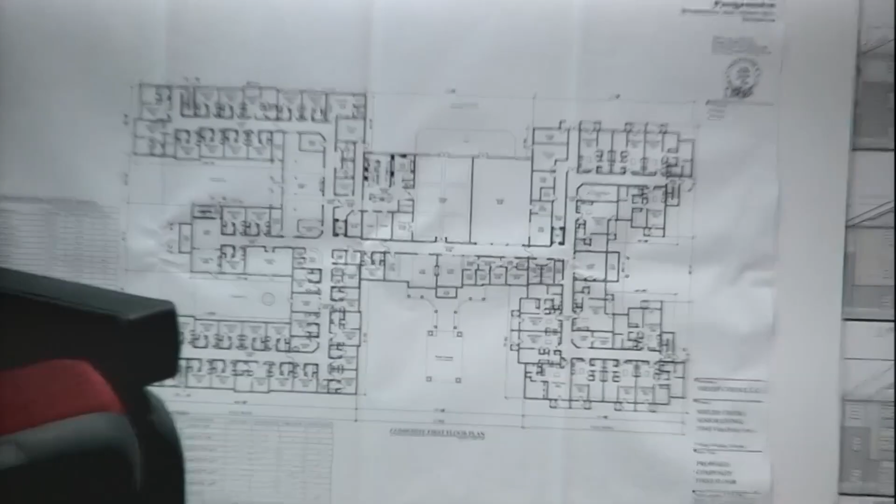And so we talked to different management groups, and this is what their suggestion was. This is one of the reasons why we're here, to try to get this project approved. We meet every aspect of your ordinance. We went and obtained a DEQ permit for the floodplain impacts and the wetlands impacts. We do have a permit from the Department of Environmental Quality.

The site meets all the restrictions, all the parking requirements. The facilities will house 166 units. The discrepancy between the 165 units and the 166 is that they added one unit as a guest unit for people out of town visiting their loved ones or whatnot. So that's why there's 166 units.

There's plenty of adequate space inside. I don't know if you had a chance to review the actual floor plans. Inside, there's a lot of facilities for the seniors to play cards or whatnot, have bingo games and all different kinds of facilities. It was very well planned and thought out by professional management groups that manage this sort of living. This is probably some place that I may want to end up living one day.

But it's a great location. The project is approximately 8 acres. It's on Van Dyke Road between 24 and 25 Mile Road on the west side of the road. I believe it's section 9. It's currently zoned R12, and there's R12 uses on both sides. The whole zoning on that Van Dyke Road is all R12.

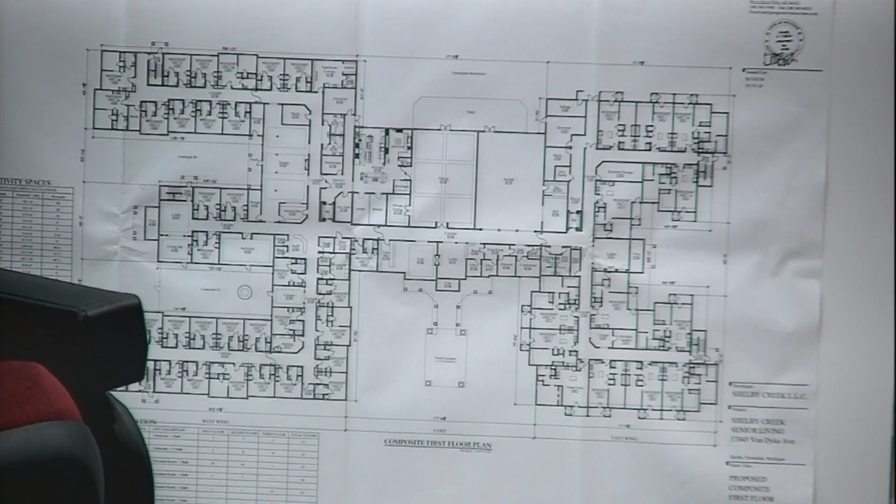And you're comfortable that what you're proposing is adequate to their requirements? Exactly. In the plans, we spent almost 2 years reviewing and doing the plans with one of the top architects, Dan Tosh, from Progressive Associates. I don't know if you're familiar with him. He's one of the top designers for senior living in the state of Michigan. He's won numerous awards, so he knows exactly what to do and how to lay out the units.

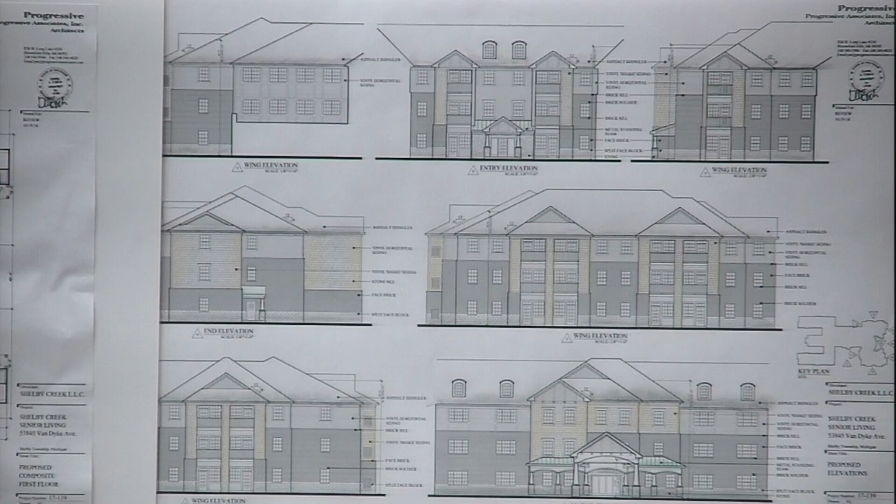Have you done a market study? Yes, there's a feasibility study that's been done, and it's very positive. Otherwise, you don't get the funding.

To the board, any questions? I do have a question. So you are proposing a bridge over the middle branch of Clinton River, correct? That is correct, yes. Are you going to have railing or some sort of guardrail? Because I think there's a 6-foot drop from the road to the drain. Yes, there is.

The only concern I have is access to the site. If there's any problem with the box culvert or the bridge, any problems with the sanitary and water main requiring repairs, the road will be shut down, trapping the 166 units. The box culvert is in 3 sections, so more than likely all 3 sections would have to fail for that to happen. There's always a portion that's going to be open—we thought about the same thing, so there are multiple layers of service.

If there's a problem with the sanitary sewer going underneath the box culvert—the excavation, the width of the trench, having vehicles working on the site—I think that's going to shut down the road. That would all have to be engineered. You're correct, but that could happen with any other service of a sanitary sewer. Just because this is over a river, there's no way to get out—if there's any emergency and the road is shut down, how is the senior going to get in and out? Well, the road won't be shut down.

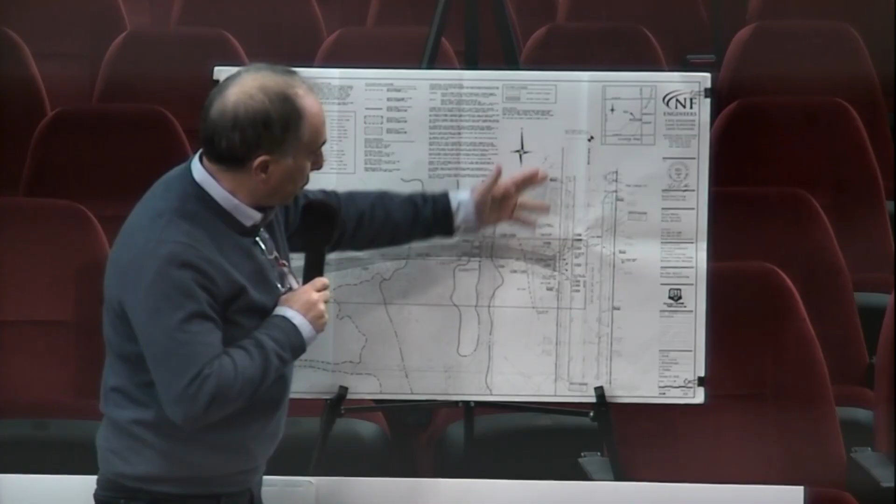This driveway here is 33 feet wide onto Van Dyke. It's a commercial road, no different than another commercial road such as Van Dyke failing. What happens if Van Dyke shuts down? This box culvert is going to be engineered so it won't fail, no different than any other bridge on 21 Mile Road or 22 Mile Road.

What happens when those bridges fail? You have another access to go around it. This is the only drive going to the site - the only drive to connect to your facility. If there's a problem with 24 Mile or 25 Mile, you can go around it using 23 or 26 Mile.

Can you explain the culverts being in multiple pieces? There are 3 sections of culverts - 10-foot box culverts. Chances are this is no different than the bridge design they did on 21 Mile Road through the Clinton River, with culverts and bridges. I'll ask our resident engineer on the board, what's the likelihood of those 3 components all failing at the same time? They won't fail all in 3 pieces, he's correct.

But if the sanitary sewer is deep at this location to service your facility, one piece removed to replace the sanitary sewer won't be enough. You'd probably need to remove 2 pieces to replace the sewer, and the other portion you're leaving is where vehicles come in and out to excavate. That's why there's going to be a temporary shutdown for the facility.

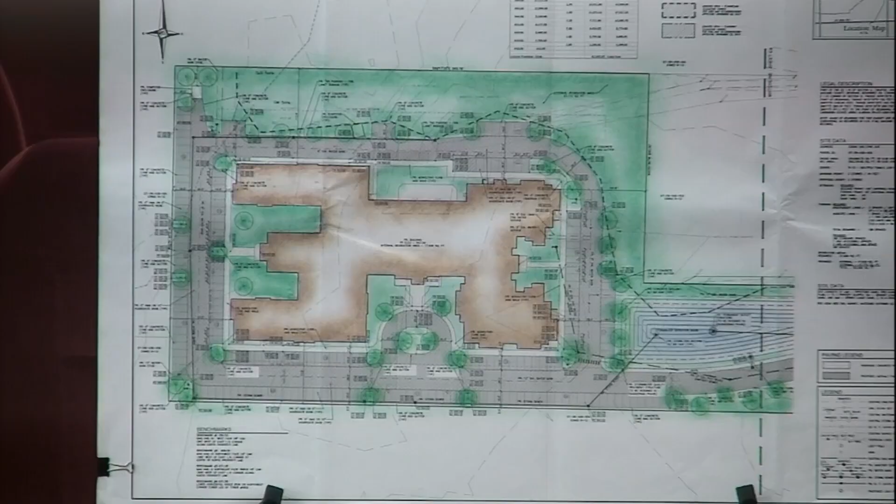When we had this meeting here last year, it was turned over to the DNR to determine if this was going to be accessible to build on this property. Has there ever been a report from the DNR back? There has? Is this going to be okay for this? Like the other gentleman said, is there going to be flooding over here later on?

And also the impact on nature. This is one of the last stands in Shelby Township that has trees and everything. We've already developed land north of it where they've clear-cut it. Behind me, I live across the street, and there's not really a whole lot of places for the animals and everything to go anymore. When I come out here, that was the emblem of Shelby Township, a nice big beautiful tree. Well, the joke going around is all that's left anymore is just a stump.

There's plans to build another one of these north of this development by 25 and Van Dyke. There's another one going on south of this already. Is this what we're going to be classified in that little stretch as, the senior citizen complex? That's all I have to say. Okay, thank you.

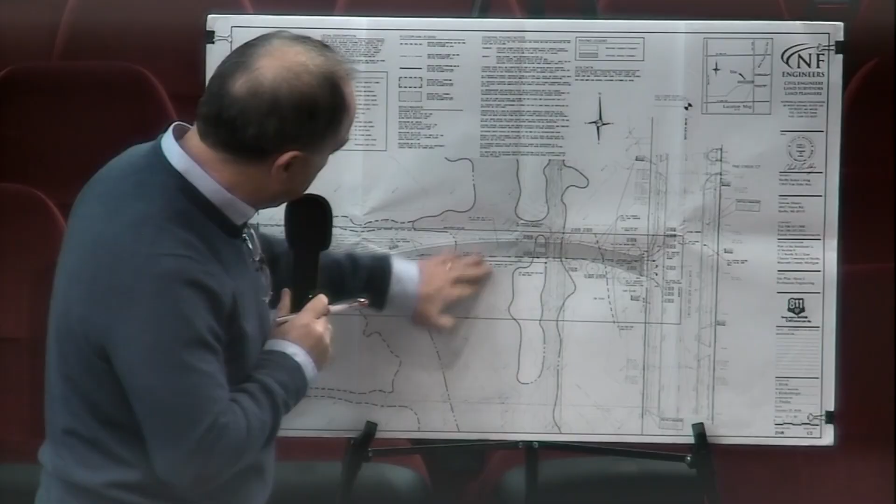So where you have the road and then the shaded area, the wider shaded area — can we look at the plan? Not here, next to it, to the left. No, this — the wider shaded area right next to it. Where is the floodway? This piece is all floodplain. This is not being touched.

Okay, I can't reach there, so the floodway. Do you mind if I approach? The guys in the glass booth might be upset, but they can't get our microphones to basically work.

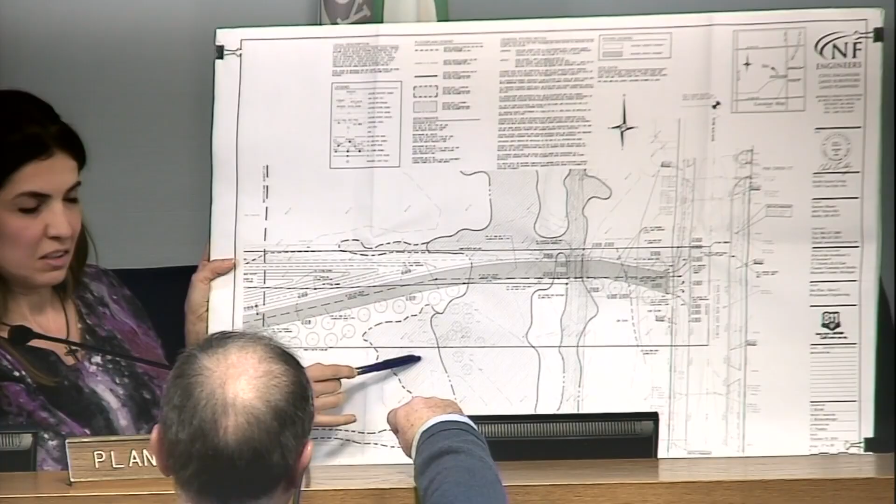So this shaded area is all floodplain. Correct, this is a floodplain. So you're filling this road. Correct. So this all is going to get filled. Correct. So I'm asking if this pond accounts for the 2 inches over the site plus the fill material. Yes, we wouldn't have had a permit without that.

Okay, that's how it works. You know that, you're an engineer. How do you get a permit?

Just make sure you get a LOMR. After the work is done is when you get a LOMR. You can get a CLOMR prior, correct — a conditional letter of map revision. Make sure the site is going to work. We'd rather get the LOMR after the work is done.

Mr. Wozniak, would you do a CLOMR? I would, if it was me designing the site, I would do a CLOMR. Well, you're not designing the site. But if it doesn't work, then it will be an issue — obviously you won't be able to build it.

He wants to do it after it gets built, the LOMR. You can get a conditional letter of map revision from FEMA, or you can get a letter of map revision after the work is done. Being that we have the permit from the DEQ and the DNR, they're allowing us to do the work. There's a 5-year permit — if we get the work done within 5 years, then you apply for the LOMR, which is a letter of map revision.

Typically for residential, our first floor is 2 feet above the floodplain elevation. We almost don't even need a LOMR because it's not going to affect the site, since all the residences are 2 feet above the floodplain elevation anyway. That only applies to single-family residential. So whether or not you get the LOMR or CLOMR — I'm sorry, we keep talking about this, but the comment is not about your facilities getting flooded or not.

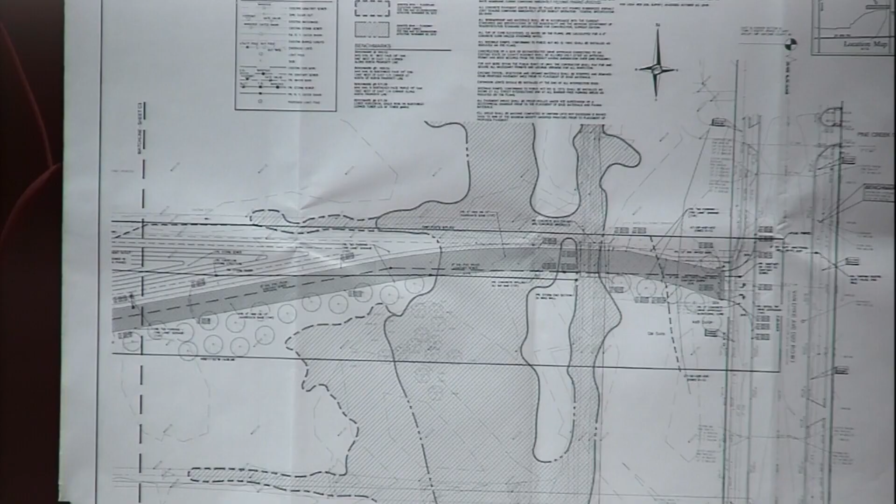You can submit it to the township engineer and she'll take a look at it. But we already have. Can I interject here for a second? Why don't, before this goes to the board, or if you want to table it, I'll have our engineer send us a letter documenting what permits and requirements are necessary, so we can get that settled. But the engineer has to review and sign off before anything gets done on the property.

I can try to get some clarification for the file and share it with everybody. I think that's fine, but I don't think it's a condition of this approval. But before it goes to the board, I'd rather have them have that information if they have those questions.

Anyway, I wanted to point out to the residents and everyone on the board, these really aren't surprising questions. Our township engineer made some points originally in their report. It must be demonstrated that the storage in the proposed detention area is provided above the existing groundwater normal water elevation. There is no storm sewer indicated for the entrance drive. Stormwater management must be provided for the storm sewer in this area.

And all drainage must remain on site. Adjacent to the entrance drive at the southeast corner of the site, it appears that drainage is not contained. So just letting the residents know we've already addressed these issues, and they're going to be worked on. I think everything we brought up here is pretty relevant. Thank you. Okay, is there a motion to close the public hearing? So move. Moved and supported, all in favor?

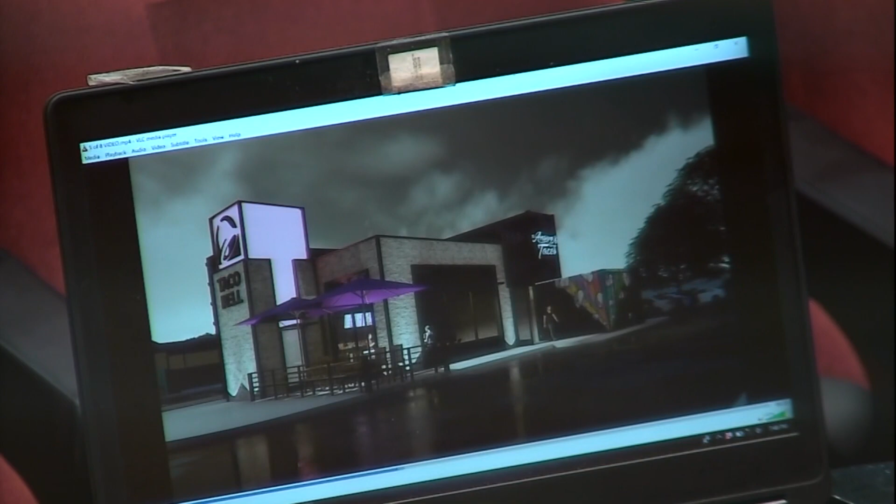That goes through the history, why we want it. So perks of a container are you're going to have a faster construction schedule, you're going to have green initiatives because you're reusing product materials, and you're also going to be on trend. Taco Bell is always trying to be ahead of the curve and be that trendy new restaurant, and this really fits in with that.

Talking with Glenn and the planning department, we were looking at different options originally. What we came to is let's paint the containers black and make them look more like the neutral feel of colors in this area, but also have some brick-looking elements. So you'll see the dining room area there is a different color, and the black is all the containers.

These renderings don't do a great show, but I think in your packets you should have that full package of renderings so you can see all the different views of the building. This just kind of condenses it and puts it all on one. Some other features of this building are some artwork elements to just break up that monotonous black.

So that's the building, but then the site is another reason why we're here. I'm just going to step over towards my site plan. It's all in your packet, but the site is not a standard square, and there's the drive-through that comes around. This is going to be the drive-through window up here at car number 1, and we have a stack that goes all the way up to 9 cars, and you can probably even fit more than that before even starting to stack on the site.

This site is currently a Pizza Hut, and the building sits on this side. So we are going to flip that, and this is the Burger King down here, and now the building's going to be over here.

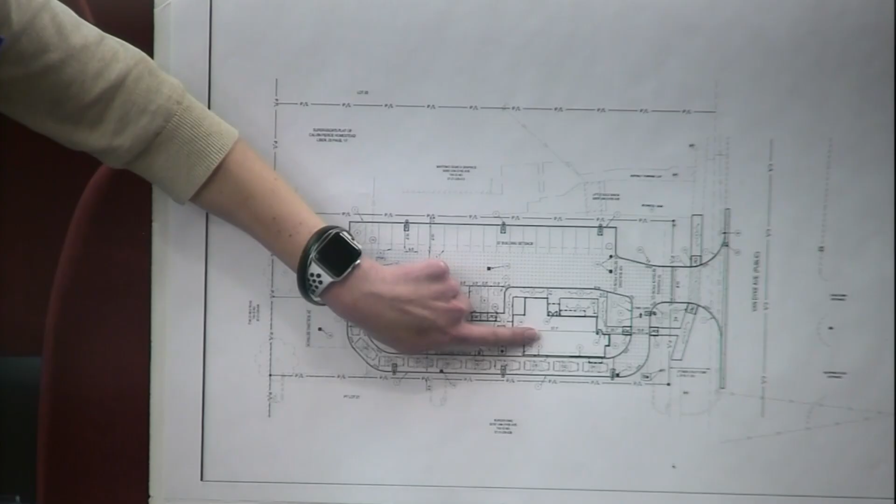One of the questions I know Glenn had brought up is a bypass lane. That is not required by code, but there is sufficient stack, and we do meet standard code requirements. The width of the site does not allow us to fit in a bypass lane unless we were to reduce the width of the drive-through lane, and that's the only way we'd be able to fit one in. But it is sufficient and meets code for that reason.

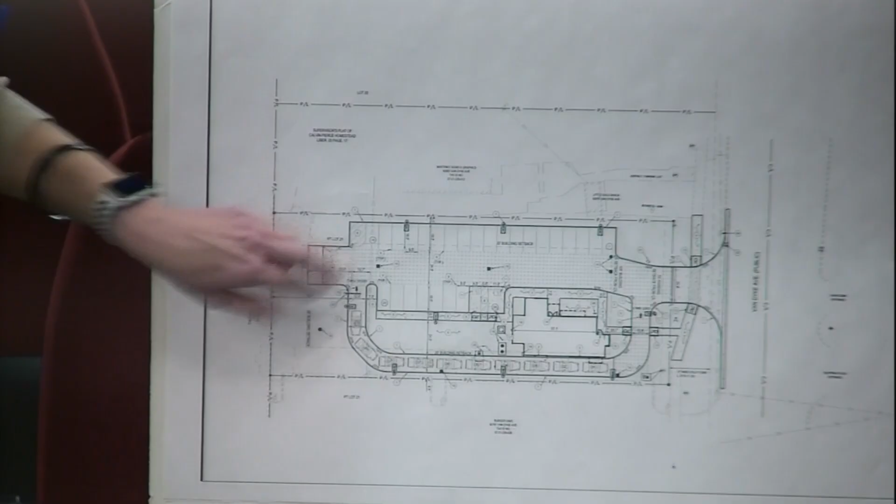Other things to point out on site: we have a dumpster here in the back. It is a 24-foot wide drive aisle, 24-foot wide curb cut here in the front for dual access, and we meet parking requirements.

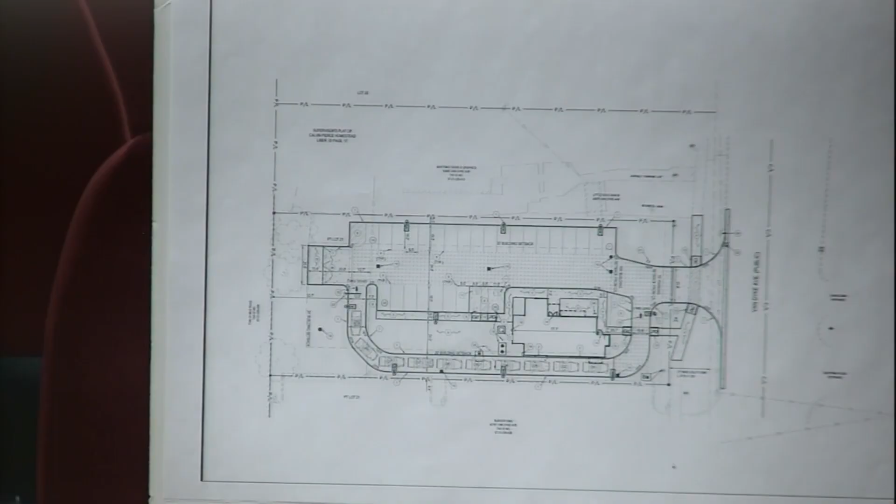For drive-through requirements, we are going to propose a small patio in the front here, and there's also going to be a lot of landscaping on site. We will also fix the sidewalk in the front, and there are a few comments on that on how I think the township engineer wanted that revised, so we will make those changes too. But other than that, with the site, we feel we're pretty much on target.

It's more the building and the building elevations that we think we're going to need to discuss tonight. But we're here to answer any questions, and I'm here with GPD, and JC is here with Taco Bell to help answer some questions too.

Now, is this a franchise or is it going to be a corporate location? Corporate. They do have the option, though, that they could sell to a franchisee at any time, but my company is contracted through corporate Taco Bell to do everything right now.

Good evening, I'm JC Buitrago. I'm with Taco Bell, with the architecture and design team, and I'm actually in charge of all new concept design for Taco Bell. So this is my design, basically.

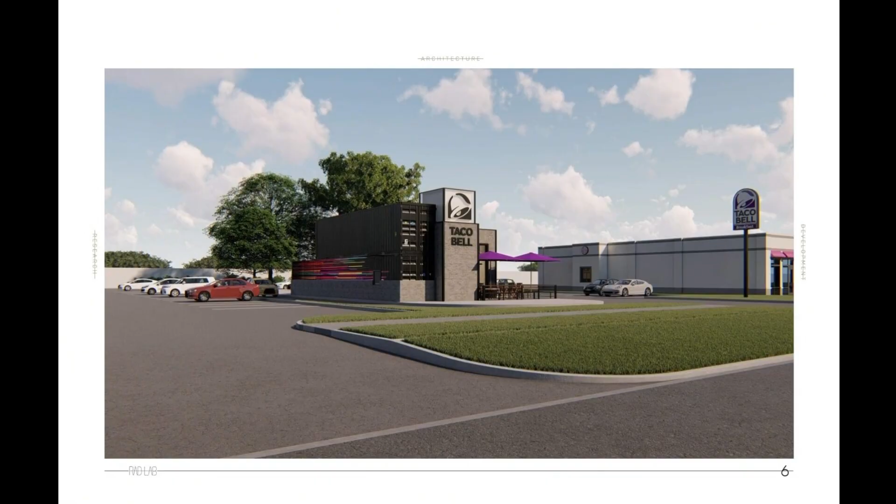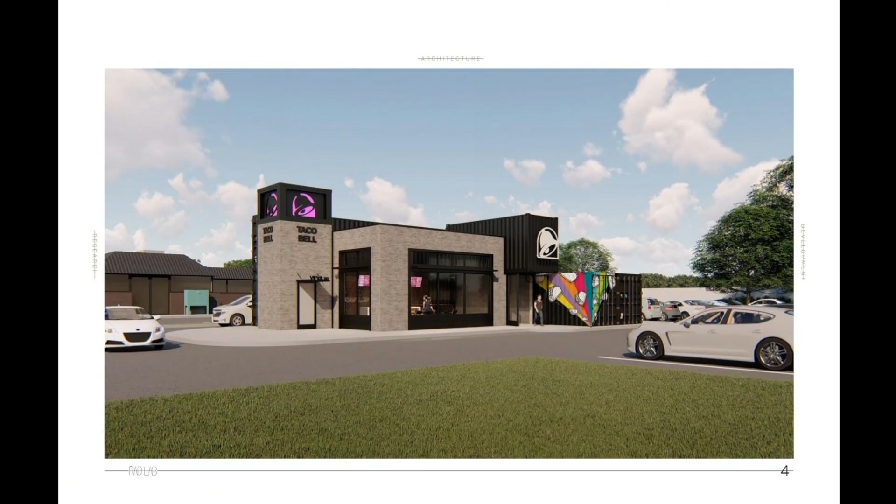First of all, I just want to let you know that this is actually intended to be a national rollout, not a one-off that we're trying to do. As Ellen mentioned, Taco Bell is an innovative company—we're the only ones that can get away with putting Fruity Pebbles on your tacos. I don't think any other brand can do that and actually get away with it. Like our products, we want our buildings to also be innovative, and we feel this building is a pretty good reflection of the brand itself. We are thrilled to be here, and we want Shelby to be our first ever fully dine-in shipping container store, which we can then roll out on a national level after that. So just wanted you to know it's not a one-off, it's actually intended to be a national rollout design. Thank you for your support.

Maybe talk a little bit about structurally—is it more that you use the container for the facade and then build framing on the inside of it, or how does that work?

So we basically left the containers to the back of the house. We were cognizant that this being a new design—even though it's becoming a national trend to use shipping containers for residential and restaurants, and a lot of our competitors are using containers for their own designs—we wanted the dining area to be a hybrid, built on site, so that we could achieve the volume we want, so our consumers don't feel like they're in a low ceiling condition. Also cognizant of the site context, we wanted to put our best face forward on the front of the building, and left the shipping containers relegated to the back end of the house and the drive-through side.

To the board, questions? Yeah, Mr. Chairman. Mr. Turner.

I think it's a very creative and cool design, but I have some questions. You call this a national rollout. Why did you pick this location in Shelby Township for this building? You call it neo shipping crate architecture. Why would you pick this location?

I'm just curious. To be honest, we only have about 30 locations per year of assets that belong to Taco Bell that are company owned. And we felt that being that you're so close to Detroit, being a suburb of Detroit, that this would potentially be a good location for that.

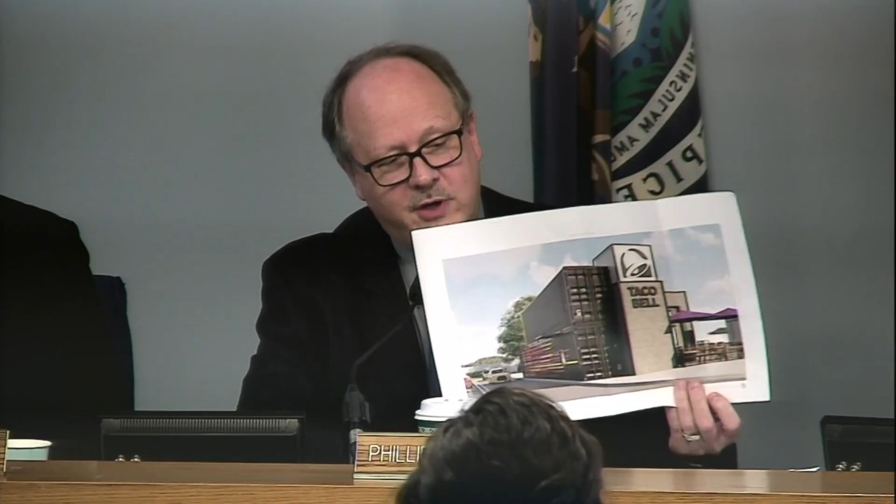I'm just concerned that it may be a little too much for this location. Looking at the rendering you could see from Van Dyke, I think that might be a little too much with the double stacked containers. I've never seen a restaurant like this. I've seen it done in housing, downtown Detroit, they're doing that for housing. And this, to me, looks like it would fit in perfectly in East Lansing or Ann Arbor or something like that.

My level of comfort's not quite there. I really admire you for what you're doing, I think it's great, but I'm just a little uncomfortable with it, just because it is probably so new.

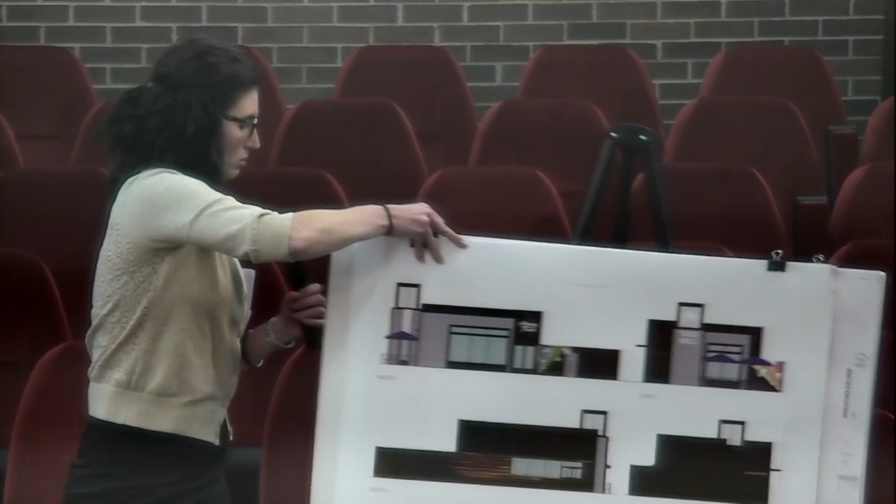Well, some things I'd like to point out—I'm going to flip this so we can all talk about the same sides of the building here. Whoa, maybe not. Thanks. We'll just hold it here.

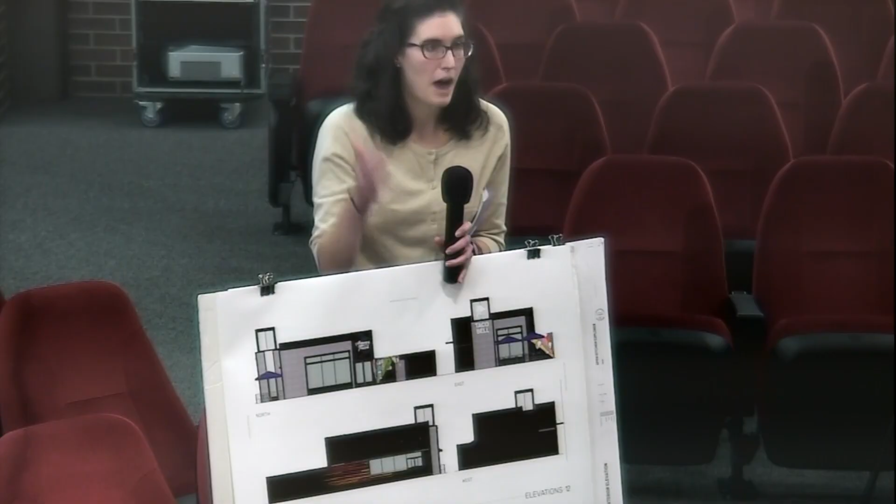So what's going to be visible from the road exactly? Obviously your front elevation, where you have mostly the brick-looking facade, and that's the look we're going for. Yes, it's a container store, but it's a dressed-up container store. It's not just a box, 8 boxes stacked on top of each other. It's a different configuration. But the front, this tower, that's going to be the predominant thing, along with this light up here. That's going to be what stands out, not the black container.

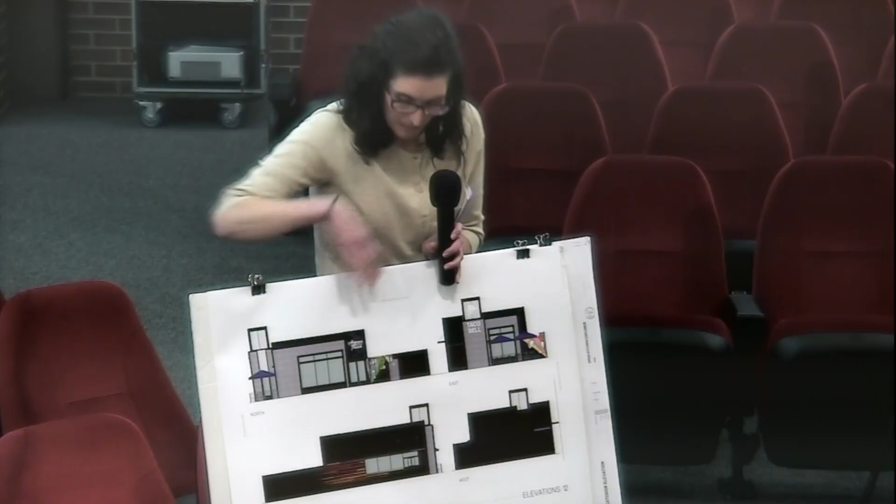This side over here that you're looking at, that's this side—this is all drive-through side. The Burger King building is very close to that. They have their parking lot and their building, so when you're driving down Van Dyke, you're not going to be able to see much of this side at all. You're going to be able to see maybe this front portion, on the right side.

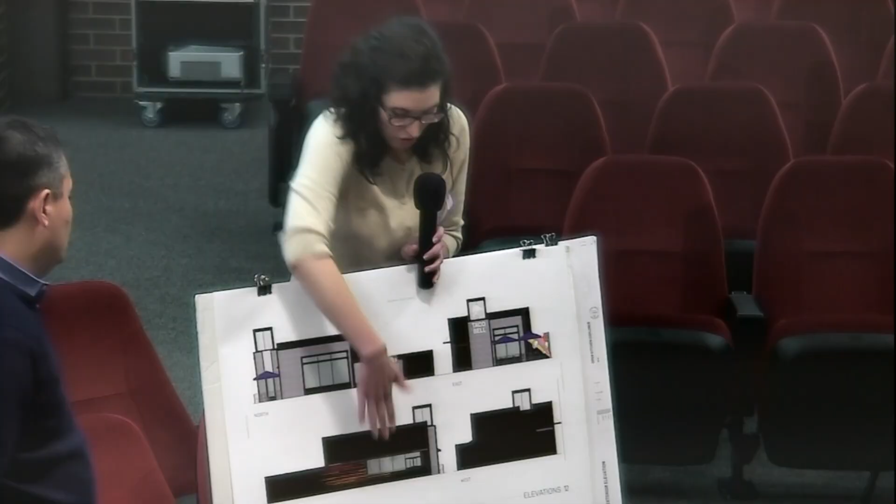Some other things Taco Bell is also doing now is this open kitchen concept. So if there's not a car parked right in front of the drive-through window, they're going to see windows into the building. It's not going to look like just the black that you're seeing—you're going to see windows, and not only the windows, you're actually going to see the people behind them getting your food ready, actually making it. So the food becomes obviously the star of the show here.

I have to say, my initial reaction was this seemed like more of a use for a more urban area than suburban. But it frankly didn't take me very long to come around to say, from a planning perspective, that stretch of Van Dyke has been developed for 60, 70 years, and a lot of it's old and tired. So to have a little catalyst, something that's new and a little bit outside of the box...

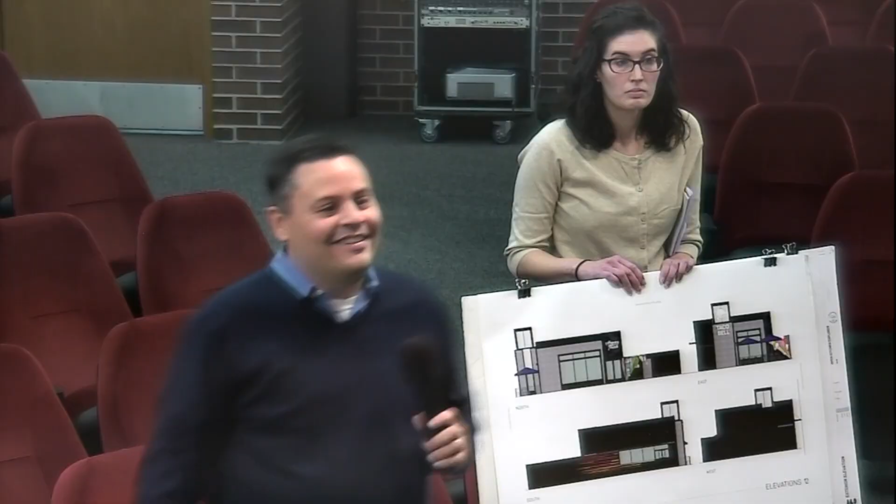But as you point out, and I think that was a nice job to show what's next to it—a new Verizon or, it's a T-Mobile, and they actually have a gigantic pylon that's bright and pink and vibrant. So it kind of fits, and then there's Burger King. Frankly, your demographic isn't me anymore, but my three 20-some-year-old sons are all about it, and this would fit more to them. Not that this is going to be a destination, but at least it gets people talking about an area in the township we've talked a lot about recently regarding redevelopment plans, and sometimes it takes little small sparks to start that.

And if people are thinking more in those terms, I think it's helpful. I'm not sure that I like the pinstriping on the side, but short of that, we can change that. That's just meant to give you a sense of motion.

Don't undersell it. If it's a container, own it. Don't say it's going to minimize this. It is what it is, and we need to sort of, ultimately, we're just going to recommend, and the township board's the one that frankly gets voted on.

I'm very intrigued, and I'm encouraged by it, and actually I like it. I want to echo what you said, Mr. Chairman. The context is important here, and I think Ellen did a nice job explaining architecturally what's around it and just the age of this site. This is addition by subtraction and then addition again.

My biggest concern was a selfish one: how many phone calls is my department going to get about this? You get the phone calls when everybody cuts a tree down, there's something, a violation. We'll get a lot of calls on this, but I think once people get accustomed to it, it's kind of nice to be the first sometimes.

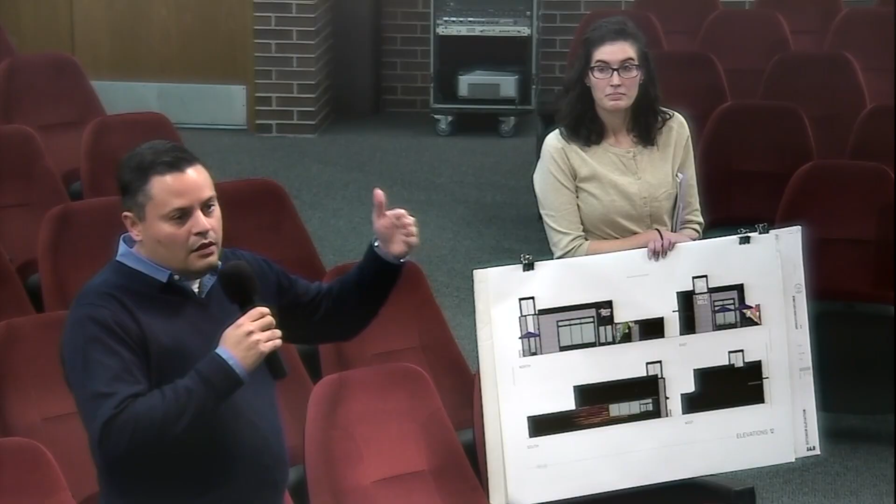But the other part of it, and I think Ellen did another good job explaining, those other materials are pushed to the back, so it's not forward. So we had some reservations, but the more we hear about it, the more comfortable we are. That was designed on staff. By the way, we did -- we understood that there was a concern about having the shipping containers right on the front, so it was a cognizant design decision to push them to the back in the drive-through elevation and have the best-looking facade right on the front, with obviously our dominant feature, which is our bell tower.

Okay, Mr. Chair, Mr. Dalu. Sir, in a different state, how do the municipality inspectors conduct their business for buildings like that and commercial? I personally walked in the residential part in Detroit, in Midtown, and it's really one of these things -- when you go inside, you can't really tell the difference, because you know in your mind it's a container, and that's the only reason. But how do the inspections get conducted for a building like that?

You're talking about the actual building inspections? Yeah. So this is all done by a third-party company that actually has the authority to inspect the shipping containers as they are being put together in a warehouse. And they basically show up on site with a sticker that says it's already been pre-inspected and approved by the time that it gets on site. And with that, it's something that the cities will approve.

Maybe to Mr. Nguyen, you know, the building department -- yeah, still our building department does that. That's a pretty good explanation, but obviously they would have to show some documentation from a national company supporting that our codes have been complied with. And there may be a different process for that if it's pre-manufactured.

Although this is our first Taco Bell container, it's not the first container store being built in the country. This is a trend -- we're not the first in the space. Starbucks has done it, Chick-fil-A has done it, McDonald's has done it. We just want to catch up to them. And I was seeing Starbucks coming up, so we need to get used to that, because Starbucks put in 10,000 locations, similar idea with containers.

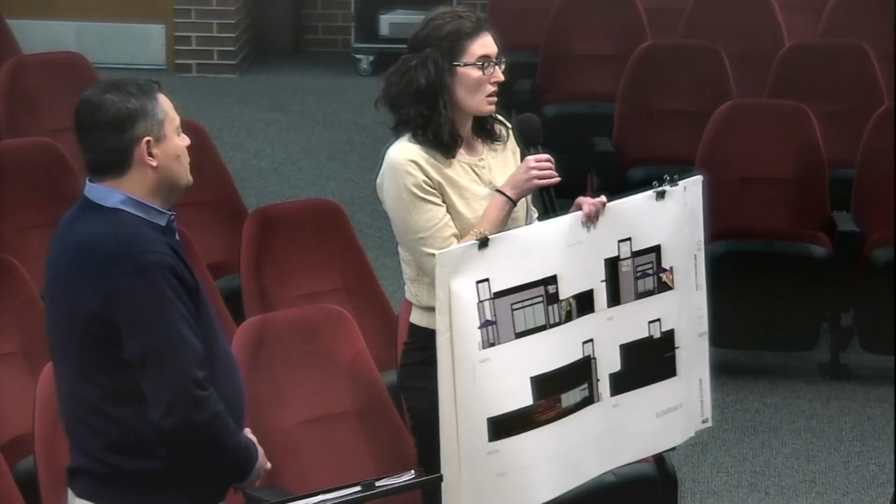Now, my understanding is that there's 4 basic designs with the containers - is that correct? No, sir, this is it right now. Because when I went on the internet, they showed me pictures of like 12 different designs with containers - was I seeing something incorrectly? You might have seen the South by Southwest one. That was the one I originally referred to, and I saw that looks completely different than this. That was just a standalone building for walk-up and drive-through service only. It was originally at a music festival, and they actually relocated it to California. So you might have seen some different renditions of that, but this is the only one that's going to be a fully operational Taco Bell with drive-through and 40 seats sit-down inside.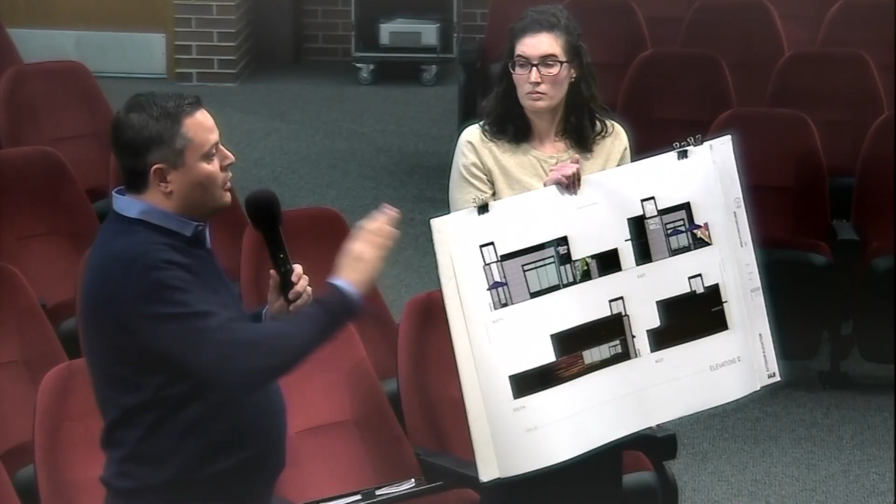The new one on Crooks Road, what is that, a standard build? I don't know what's on Crooks Road, I would think that's a franchisee. It's done in grays and blacks and looks like containers. It wouldn't be a container - probably either Nichiha or another material. So we have other building designs within our lineup that are not shipping containers. We probably have 5 different designs throughout, basically within our lineup - you probably saw one of those. But it's similar in tones, color and finishes. Obviously we want them all to be relatable so you can tell it's the brand at first sight - this is the Taco Bell building. So the finishes on the building are going to be similar from the shipping containers to our standard lineup building design. I'd also mention this design kit started with like 30 SKUs and now it's up to 130.

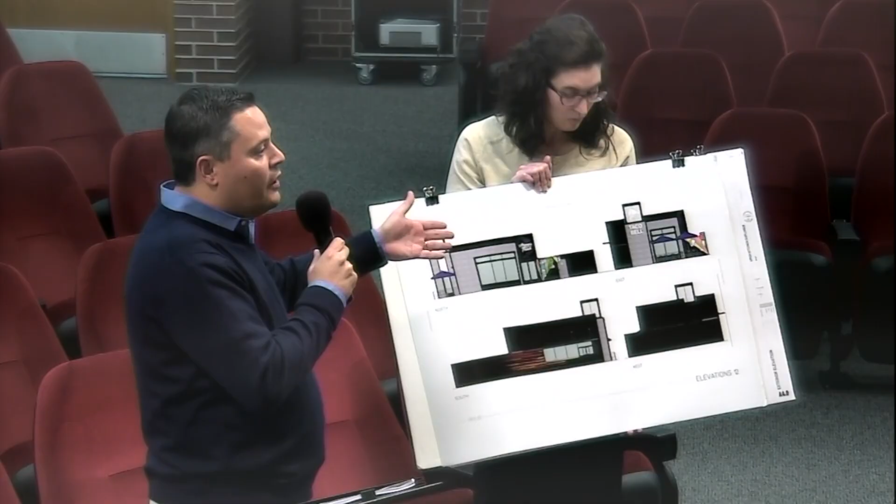So are there more designs available than what we're looking at, for the shipping container? Yes, we can always adapt. The original design we developed for the shipping container did not have brick on it - we had James Hardie fiber cement siding on the face. We understood that the preference here was to use brick on the facade, which is why we changed the design. The original template is basically the same layout and same sort of language - the finishes are what changed, so we can accommodate Shelby's requirement.

I don't want to be a fuddy-duddy, but from the comments from the rest of the board, I think this might be a bit avant-garde for us - not all the board, the younger ones. I'm just wondering - yeah, right, this is what people are saying. They hated the Eiffel Tower when it was built originally, and now it's a landmark. So this isn't the only design we have to approve - we can see what else they've got, if you want to let them show it to us.

So that was the main purpose of my questioning and comment. Okay, because they got other stuff they could show us. Thank you. Welcome. Thank you.

Mr. Chairman, Mr. Turner, honestly I came in here tonight very skeptical and pessimistic on this, but after listening to Ellen talk and after seeing it, I think it possibly could be something cool and a neat addition to this area, even though it is avant-garde, new and unique and creative. Maybe it's not too new, unique, and creative. I don't know, but I'm having second thoughts.

Thank you. On a half-acre parcel in the middle of the township. I mean, okay, its footprint isn't a million square feet.

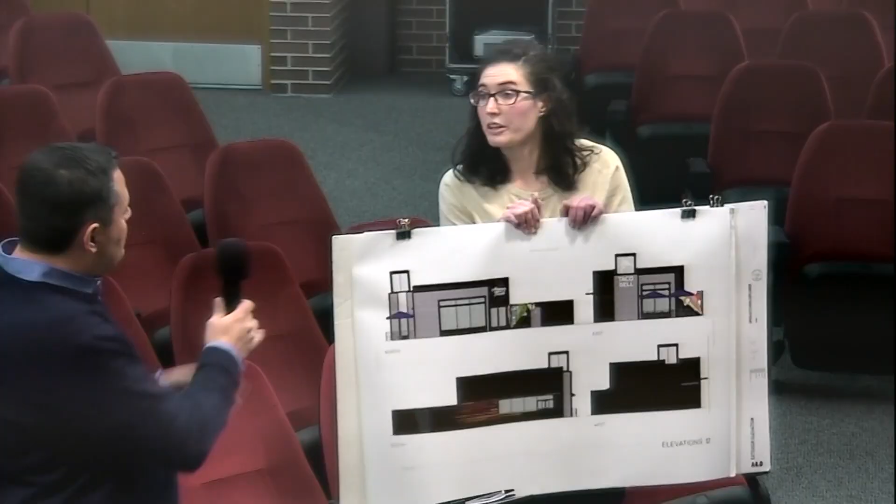We do have, do you have the other options? There are some other ones we can click through. There's some different options. Yeah, I guess we're not buying a home, so we're not going to pick and choose elevations sort of on the fly here. I think this is what's been presented, and I think this is kind of what we need to deal with. If there are other elevations that can come back to the board for us, or maybe even to work with the planner on another sort.

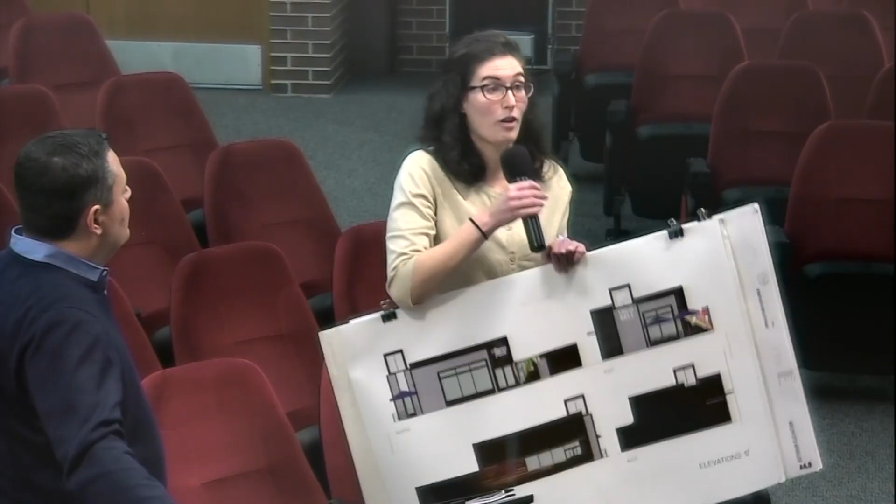So we would like to keep this project moving forward. We are ready to start design tomorrow. If you guys say we like it enough, work with Glenn and get it figured out, maybe add some more brick on the side, fix your graphics that are not to your liking, we can work through those kind of things.

Yeah, I mean, and again, we could schedule a study meeting, I guess, because I just don't want it to be a case of negotiating here with nine different opinions, because we'll never get anywhere. Okay, so.

Can I ask another question that goes along with that? Sure. So if there was a special study meeting, what would be the timeline then? Because we know that we still need a variance too, that we have to go for.

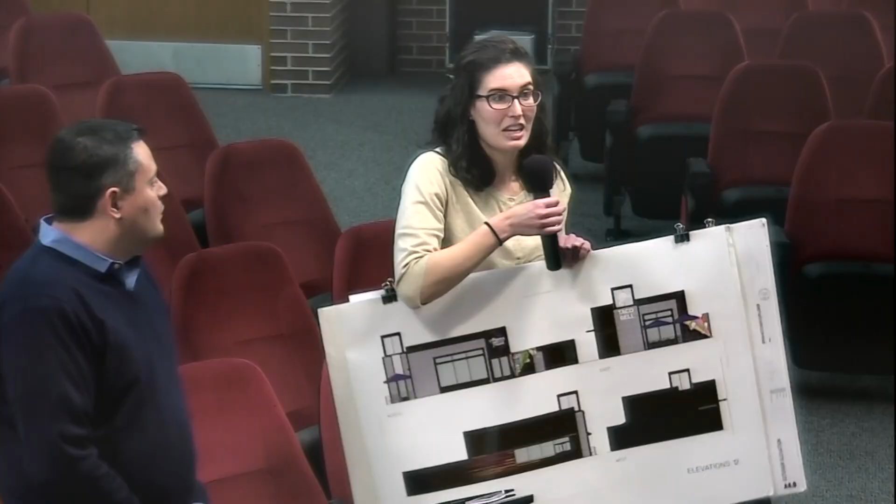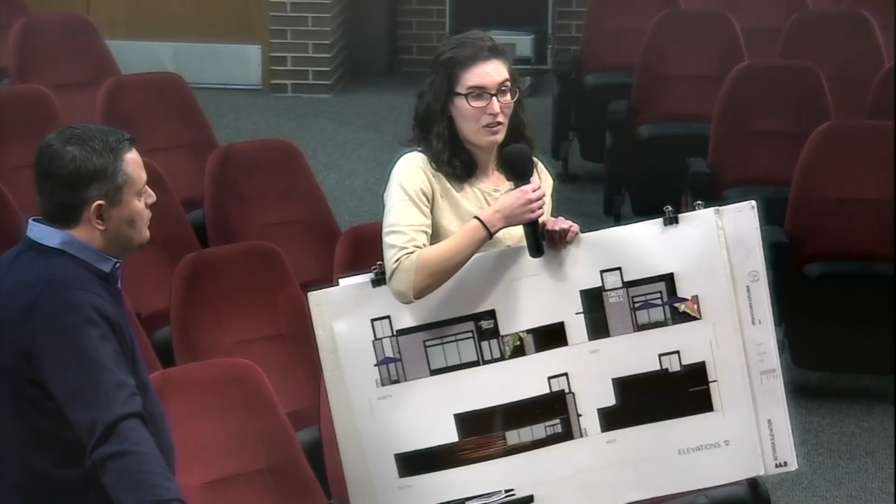There's some site variances, it's for a setback on one of the sides, and there was a second variance too, I think, but they're site related, not building related. But we have some other steps that we have to do, and even though JC mentioned that we're getting this property from another Yum partner, there's still a timeline that we're trying to stay within because we have constraints on the purchasing or leasing of the site. I don't quite remember which one this one is at the time. So we just want to make sure we don't hit a roadblock.

Sure, Mr. Nguyen, do you have any thoughts? Yeah, we can easily do that, but I'm trying to think, we're coming into the holiday season. We only have one more meeting before the end of the year, although we might be able to schedule a study meeting in lieu of a second meeting. So you want me to send out some dates tomorrow for everybody? Yeah, I mean, we could probably do it next month. I'm willing to put it together.

Okay, and what would be the deliverables for that meeting? Can I make- I think you would show us if there's any other material options for the outside. Let's assume the basic footprint of the building. What other material options would you have in some of these areas? Is that just additional brick, or are you saying no container store?

No, maybe just, remember when we talked to the counter, we said, are there any other ways you could introduce some other brick somewhere on the building that would minimize the amount of containers? And I think the area where it might be most appropriate would be doing a wraparound on the south side. A little bit. We do have that on one of these slides, I think it's maybe 5 or 6. Can we take a look at that, Mr. Chairman, just to see if that's moving in the right direction?

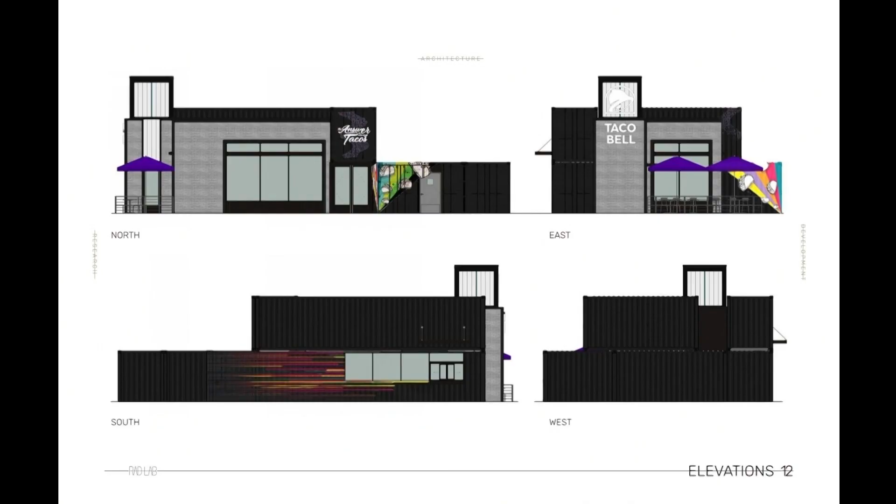Let's see if it comes in here. Can we flip that one right there? So it has the additional brick on that drive-through side, and it's just the wainscot that wraps around the bottom. You'll be able to see a little bit of that front, but there's that Burger King building and their parking lot, so it will help break it up.

I've got a better suggestion. Mr. Wynn, why don't you get me some of these designs this week? I'll get them to everybody. I'll put this on the next agenda at the end of the meeting, which is two weeks from tonight. Maybe we could at least get some material for you by then, because that's as quick as we could do something.

We don't have to do another public hearing, we could just close the public hearing. We just take action then. Even if it's on a different elevation? Yes, you could give us some revisions. We could say here's option A or option B, and see if we can find some middle ground here.

I think they've already moved in that direction. I agree, we don't want to design this by committee at the meeting, it's too hard to do. Mr. Kirk, just let you know, the public hearing is really just for the drive-through approval. So the issue on the materials, that's your discretion, so I don't think it requires another public hearing.

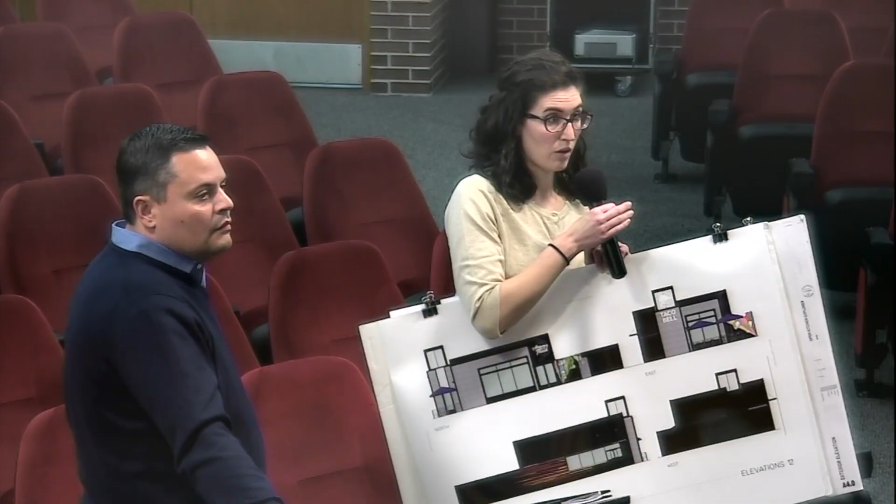So could we still get the approval for the drive-through if that's something we could vote on tonight, and then just have to do the building elevations at the next meeting? Yeah, they're kind of the whole pack, it comes together. I mean, the drive-through is incidental here, I think, to the decision. But if we don't approve this building, then you're going to have to start from scratch again.

And variances are going to be first Thursday in January. Actually, one of the variances they don't need, actually neither of the variances do they need. We double-checked them, they don't need those variances. So I think if we could get you on the next meeting as a continuation, get us that stuff in a day or two, I'll get it circulated and we'll get it to everybody.

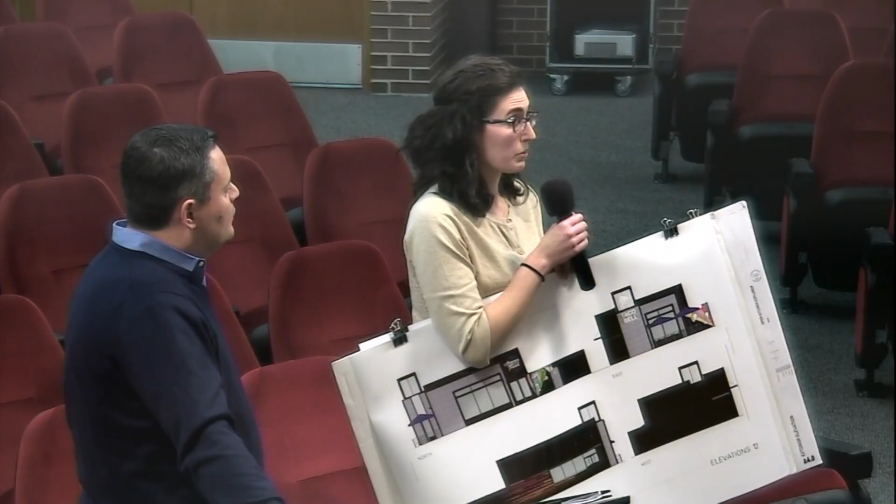Great. And so some of the options I think we'll be presenting is the additional brick along the drive-through side, and do we need to show something else with the color changing tower? I think the material is important, I think it doesn't read what that face material is, Ellen. Okay, and maybe some samples of that to show.

Do you want to look at it now? Or go look at Crooks Road by M59, I will. So we'll get you on the next agenda, get us some additional material, and we'll put that on and continue this discussion. Great. Okay, thank you. All right, the location is great.

I need to call it first. Okay, don't go away yet, we have someone here who may want to ask a question. What? Oh, you're with them? All right, so do I need to read it? All right, so given that there is no one here wishing to offer public comment, I'll entertain a motion.

So close, move the public hearing. So moved, moved and supported. All in favor? Aye. Motion carries. Do I need to read through all this stuff, or can we just table it?

Okay, is there a motion, Mr. Turner? Yeah, I'll move to table this to our December 10th meeting to give the applicant a chance to show us the new facades for the building. Moved and supported. All in favor? Aye. Motion carries. Okay, now you guys can go. All right.

December 10th. All right, Planning Director's report. The only thing I want to point out is we do have a study meeting tomorrow night, and that's going to be at 7 o'clock in the lower level conference room. The consultants we hired to do the traffic study for sections 1 and 2 will be presenting the study. You should have already gotten a copy through email and a whole package. It's a good place to do it. Thank you, thank you.